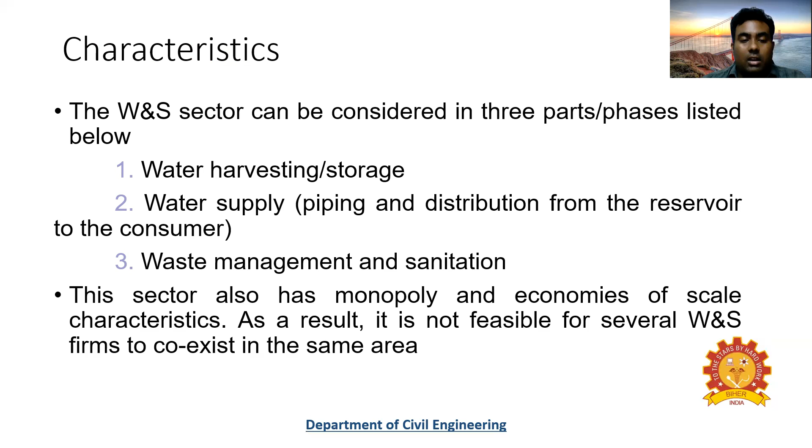That is one of the difficulties. Continuing, social issues play a very important role in guiding the policies and performance of this sector. There is a perception that water is a basic human right, which puts pressure on public agencies to ensure good quality of service in this sector. So we can be aware that this is an important sector.

Performance has to be made, as water is a basic human right. Everyone has this thought, so good quality of water determines the quality of that environment, a nation. It is a big pressure for the organization or the country to involve a huge amount of money or resources in water and sanitation.

From that, pricing of water is also a very contentious issue, since it is considered a basic human right from some quarters. This makes it very difficult to privatize water supply service, as it is difficult for the government or agencies to bring in private sectors, since the price may increase, which will affect the basic human right of availability of water. If the water price increases, the basic amenities also will increase.

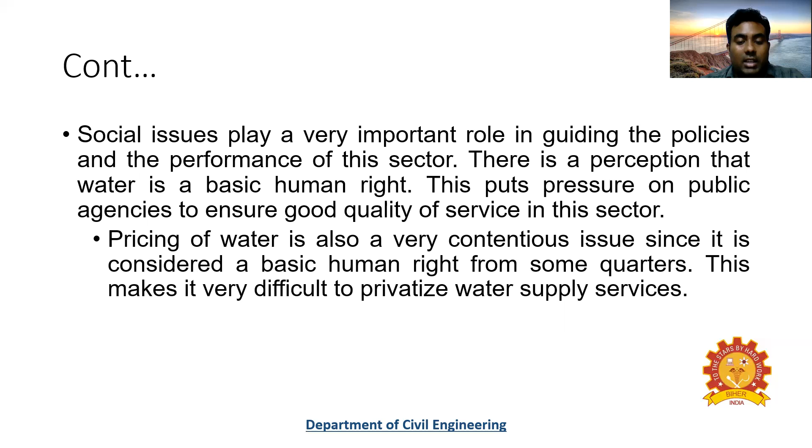There is a comparison even here: for 1 rupee you will get rice, but you have to pay 2 rupees for a pack of water. That's a basic comparison for the social issues about the characteristics of water and sanitation.

So how is India doing in this water and sanitation sector? First, 50% of urban households do not have a piped connection. Piped connection is where water supply is provided directly to their houses, connected to their house. So only 50% of urban households - not even rural - do not have piped connection for water and sanitation, meaning the remaining 50% do not have proper water connection to their houses or sanitation.

44% of households have no sanitation at all - this is for urban as well as rural combined. This increases the amount invested, since savings cannot be done if there is improper water and sanitation; the possibility of diseases reflects in the money involved by poor or middle income people. This makes a major part in the infrastructure development.

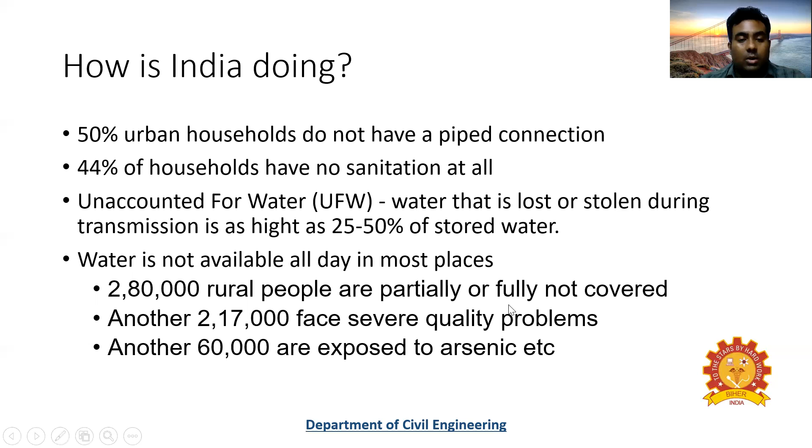The next topic is the pricing of water, still talking about the situation in India. The price of water is artificially low due to reasons mentioned in the previous slide. This affects the profitability of the local water board, and therefore the quality of service. Since the investment or budget allocated for water and sanitation is very less, the manpower allocated by the government is also very less. So the quality of service will also be less, as the manpower is very less compared to the demand required.

Next, very often the urban and rural poor are not connected to the municipal water supply system. Poor people, if they are staying in a slum area where the pipeline cannot be laid, won't have any proper connection to the municipal water supply system.

As a result, they often purchase water from water tankers at a rate higher than what average connected citizens pay. Poor people are buying water at a more expensive rate than people living in properly connected cities, where the water is available easily through pipelines and they pay water tax easily, with water available frequently without spending much money. But the poor, who don't have money, have to pay a huge amount compared to those buying water in cities.

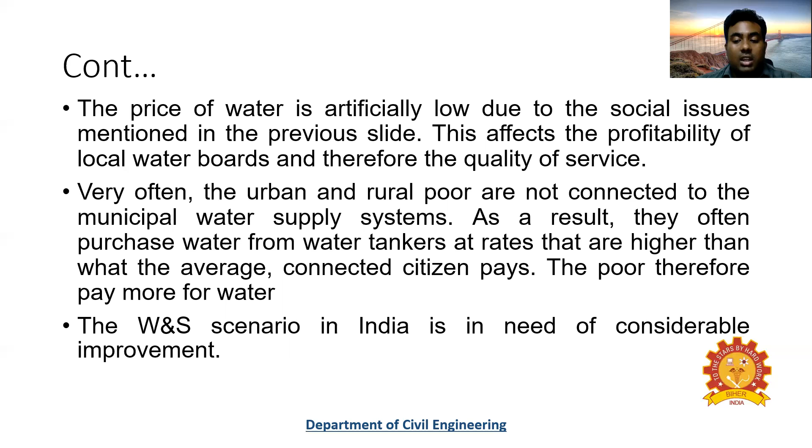The poor therefore pay more for water, which is a basic amenity or requirement for a human to live. So the water and sanitation scenario in India is in need of considerable improvement. Now, policies in the water and sewage sector.

Policies that are implemented can be taken from the 5 year plan given by the Indian government. The importance of infrastructure is twofold, which we have seen in the previous sector. We're discussing it again because we're talking about the water and sewage sector specifically.

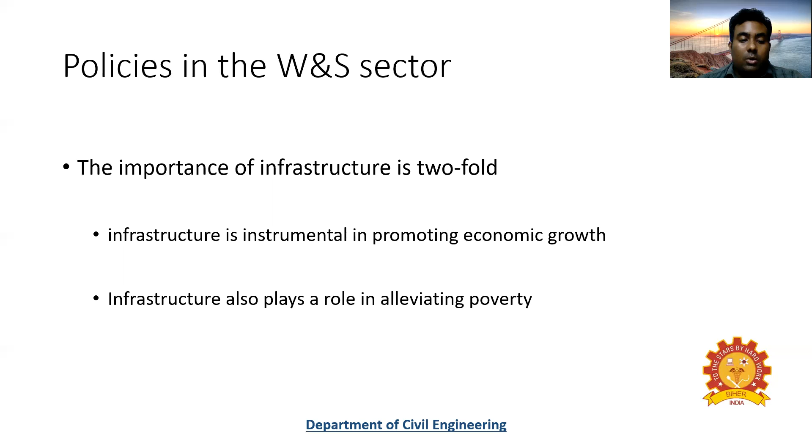The first is that infrastructure is instrumental in promoting economic growth - water and sewage sector is one of the important sectors for this. Second, it also plays a role in alleviating poverty. More reforms and policies - this we have discussed - the 10th 5 year plan and Urban Reforms Incentive Fund. URIF encourages urban bodies to reform, increase operation efficiency, and reduce subsidies.

The plan mandates providing water access to the urban poor, setting tariffs to discourage overuse, introducing water efficient flushes, etc., providing drinking water to all, increasing community participation and NGO participation, and so on. In return, funding and financial incentives are given to the urban bodies.

From this we can see that URIF, the Urban Reform Incentive Fund, provides for operation in an efficient manner and reduces subsidies so that the amount can be reduced. The plan mandates providing water access to the urban poor - URIF helps provide this access - and setting tariffs to discourage overuse, since overuse is like wastage. The optimal use of water has to be educated to the poor.

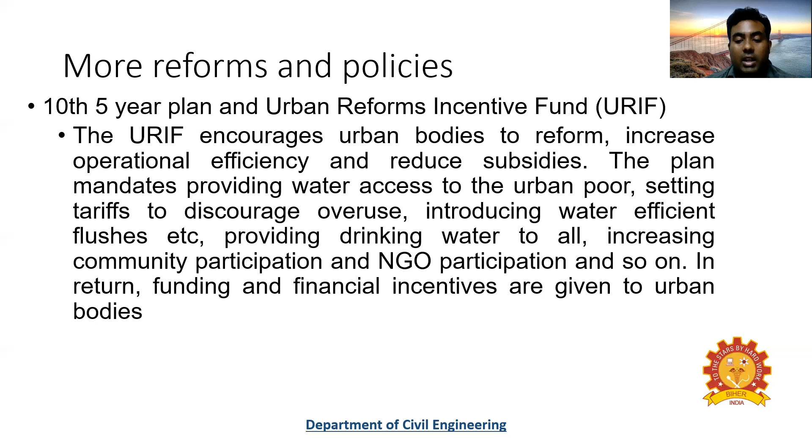So this is the reform. In return, funding and financial incentives are given to urban bodies. Urban local bodies are given funding through government funding or some other financial sector, so improvement can be done in the water and sewage sector.

AUWSP, that is Accelerated Urban Water Supply Program, is a government reform or development program promoted by the Ministry of Urban Development (MOUD). It is a separate program developed by MOUD to provide funds for water connections to smaller urban cities, which launched in 1993-1994. Indian rupees of 2000 crores was spent by 2001. This program aims to reach out with water to people who are not having access to proper water.

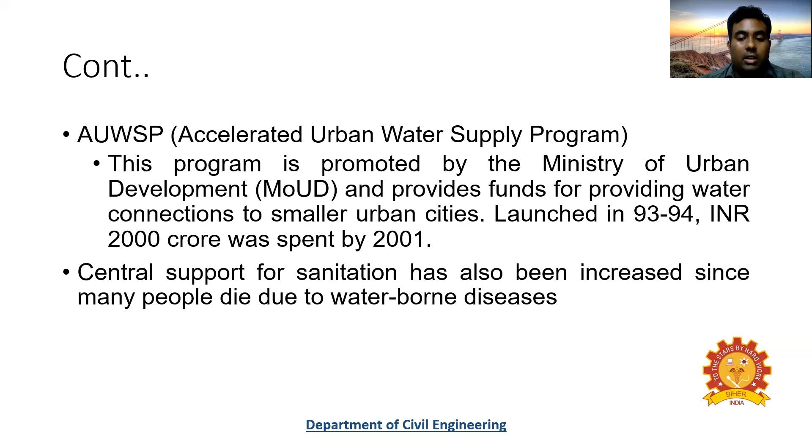Central support for sanitation has also been increased, since many people died due to waterborne diseases, as these diseases spread and caused more deaths. So central government support for sanitation also increased, so that people get proper clean water and waterborne disease can be prevented. That is the scenario in India.

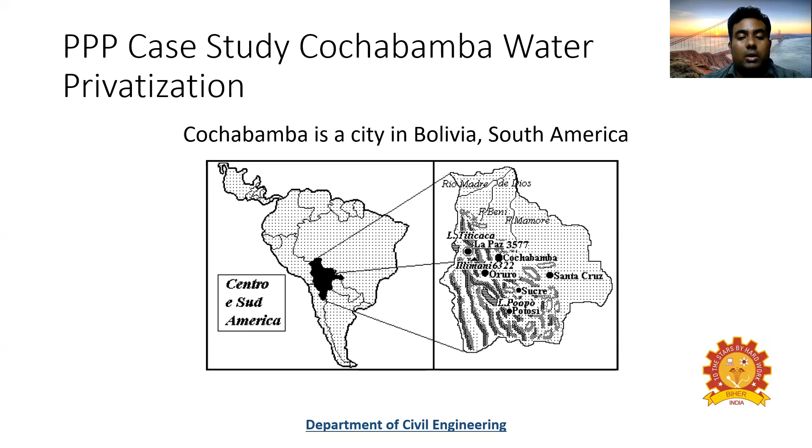Next we'll see about public-private participation, a case study on Cochabamba water privatization. Cochabamba is a South American city. I want to bring you this case study done by another research, just as an example of private public participation, what goes on in this privatization water project. So we'll see a few facts about Cochabamba.

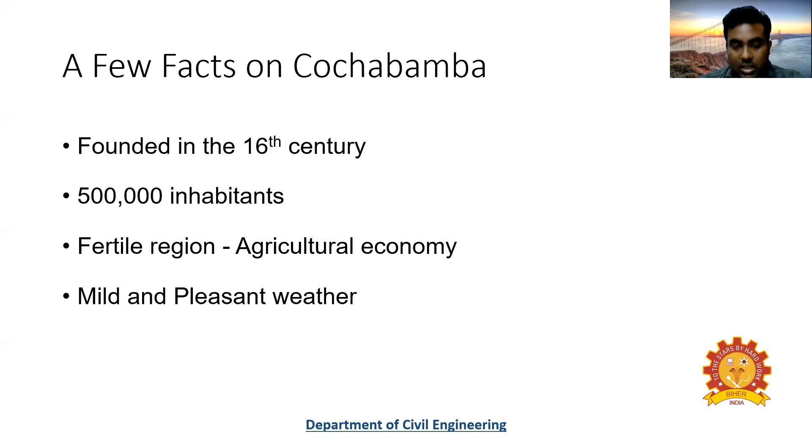It was founded in the 16th century, has 5 lakh inhabitants, and is a fertile region with an agriculture-based economy, where agriculture plays an important role. It also has mild and pleasant weather. These are some of the few facts about Cochabamba.

So, short digression on the quality of service - the quality given to people as water and sanitation. First, when evaluating the performance of a water and sanitation system, the following metrics are often considered - these basic minimum requirement metrics.

We can see the first is water pressure, then percentage of metered connections, interruption of service, efficiency of billing, efficiency of handling complaints, staffing, and UFW - that is unaccounted for water, coming under leakage and theft. We also saw that in India there was 50% loss. There's also percentage of area or residents covered and tariffs. These are some of the metrics considered when evaluating the performance of a water and sanitation system.

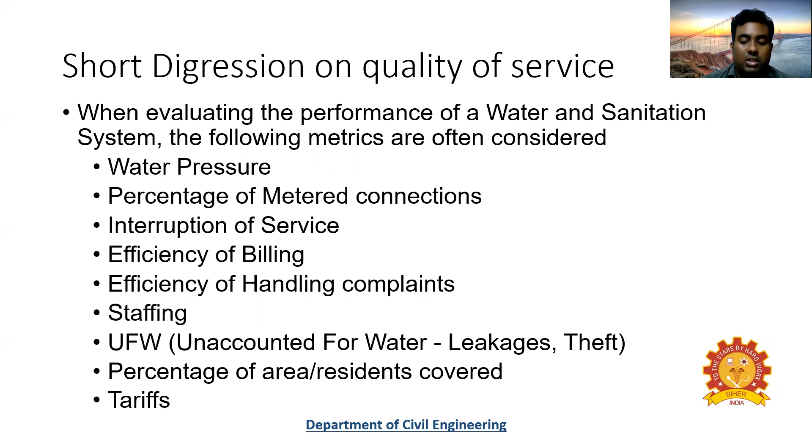So these metrics evaluate the quality of service given under water and sanitation. Now, water provision in Bolivia prior to public-private participation involved centralized public utilities, for example SEMAPA provided water - just for reference.

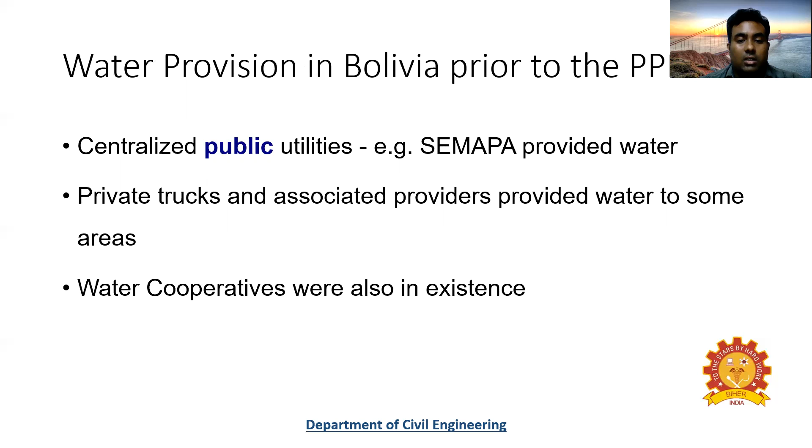So the quality of water service prior to the project in Cochabamba - we can see there was 75% urban water supply coverage, and 36% sewer connection for that city.

And the third is the financial status of water providers, which was very poor. The tariffs covered operation costs but left no money for investment. So costs were higher, but there was no sufficient money to invest as a return for the water service before the project, that is, before the public-private partnership project.

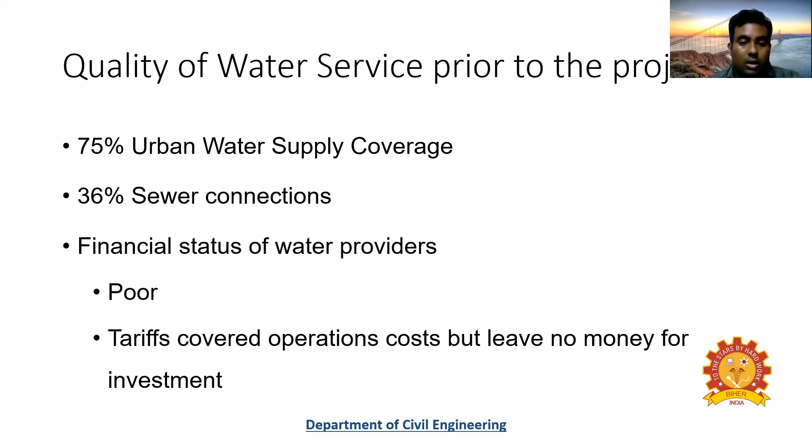Okay, given by the private sector. So performance of SEMAPA in Cochabamba. This is the public sector we were talking about in Bolivia, prior to Cochabamba. Here, 4.7 employees per thousand connections. You can see the ratio, 4.7 employees per thousand connections, thousand units or houses.

So more than twice as inefficient as the global benchmark. When you're comparing to another sector or another country, we can see that it is twice as inefficient.

From this we can see only 57% coverage was there. Coverage here, in the sense we've seen in the previous metrics, what are all the metrics for a proper water and sanitation project. So it has only 57% coverage, and 50% is UFW, water which is being wasted or coming under theft, which is unaccounted.

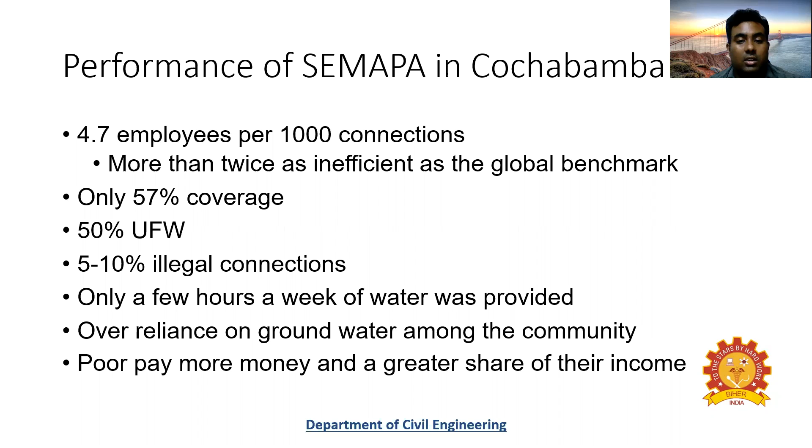So in 1997, a concession for the water supply project was suggested - irrigation, water, and power projects lumped together. But the project did not take off. Even though the project was suggested, it didn't take off.

In 1998, a concession agreement for the project was floated again. Several parties showed interest. One party submitted a bid, ADT, that is Aguas del Tunari - a term given in Spanish. The bidding process was declared null and void. In 1999, the government negotiated directly with ADT and awarded them the contract.

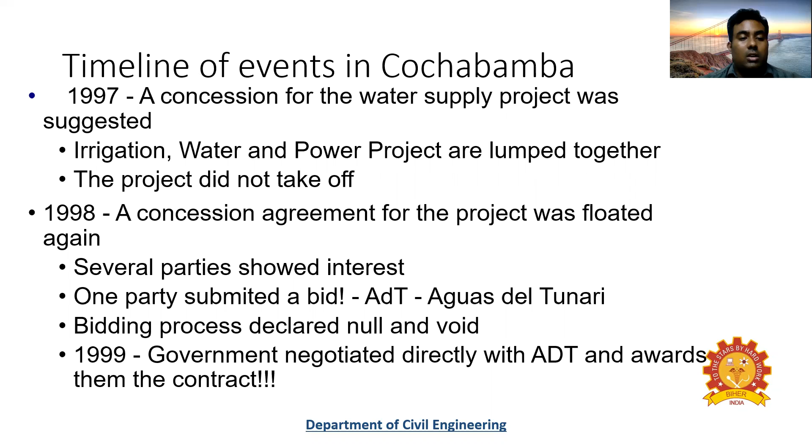The concession agreement, which had earlier not taken off, was given as an agreement. The project sponsor, Aguas del Tunari, was given a concession period of 40 years for the project. The scope of the project was operation of the existing water system in Cochabamba, and construction of a $240 million project for power, irrigation, and water supply. So this was the scope.

The tariff was set to go up by 35% initially in 1999, and 20% in 2002. An Increasing Block Tariff, IBT, was adopted, so that the wealthier pay more than the poor - nearly twice to thrice as much. The consumption by people was categorized, and a concession was given to the poorer people.

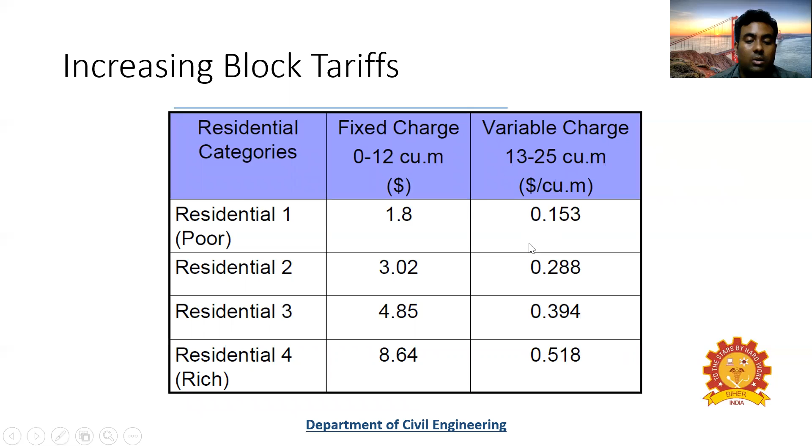Charges were also there. A coverage target was given for the years 2000 to 2001, 2002, and 2004.

New water connections of 3850 connections, meaning these are the units to be covered. This is the target set by the government. By 2004 it has to be 57,600.

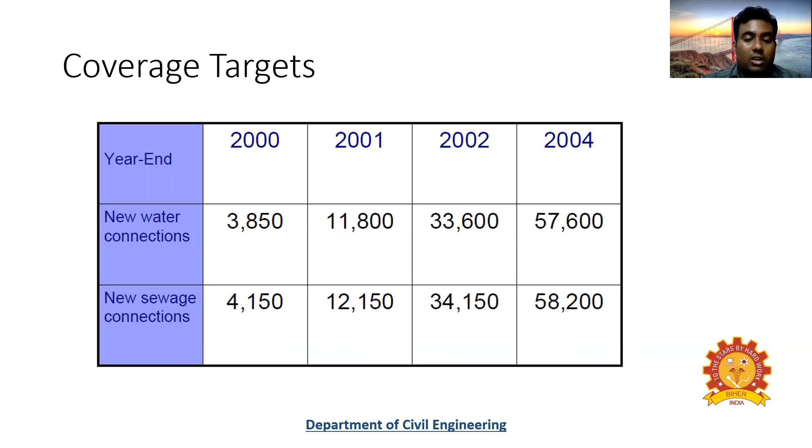New sewage connections, on the second row we can see the sewage connections, starting in the year 2000 at 4150, and by 2004 it reaches up to 58,200. So this was the coverage target given to ADT by the government.

So what happened next? Widespread protests occurred because of the rating given, and then a state of emergency was declared as more protests occurred in that state. On 10th April the government retracted the concession for ADT and gave it back to SEMAPA. So you can see the handling of the project moving from one private organization to another.

Reason for project failure: economic crisis in Bolivia. Because of that, liberalization had not led to much growth - only 4.2% GDP growth from '90 to '99. As a result, there was a lot of disillusionment with privatization. That is the economic crisis in Bolivia.

Next is ideological issues. The local people were against a foreign firm charging them for water. So you can see they were not having proper support - the company didn't have proper support.

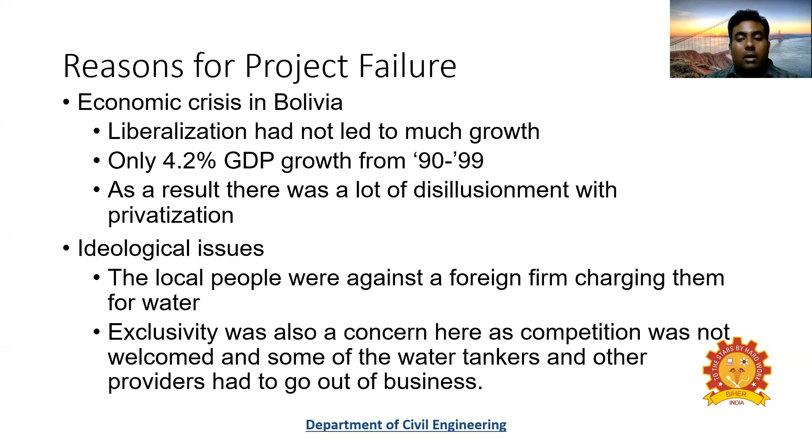Next, exclusivity was also a concern here, as competition was not welcomed and some of the water tankers and other providers had to go out of business. So local businesses were affected due to this project.

So tariffs under ADT - average increase was 35 percent, but only 10 percent of the tariff increase was for the poor. So you can see the difference. The new tariff made economic sense, as much was left over for operation, expansion, and maintenance. So this project didn't reach the target set by the government.

The rate of return for ADT was 16 percent, so they made a profit, but was this too high? Better quality supply led to more utilization, which led to higher water bills, which the citizens did not like. As you have seen, since water is a basic amenity required by citizens, you cannot charge more for it. So, social issues.

Farmers prominently protested. Rich residents had already built their own water infrastructure, so they didn't want to forgo this and buy water from ADT due to the exclusivity clause. So you can see they had sufficient funds to raise their own water.

Poor people could not get water until they were connected. Well drillers and tankers protested. There was no transparency, no consultations - professional and citizen associations were not involved in the planning of this project.